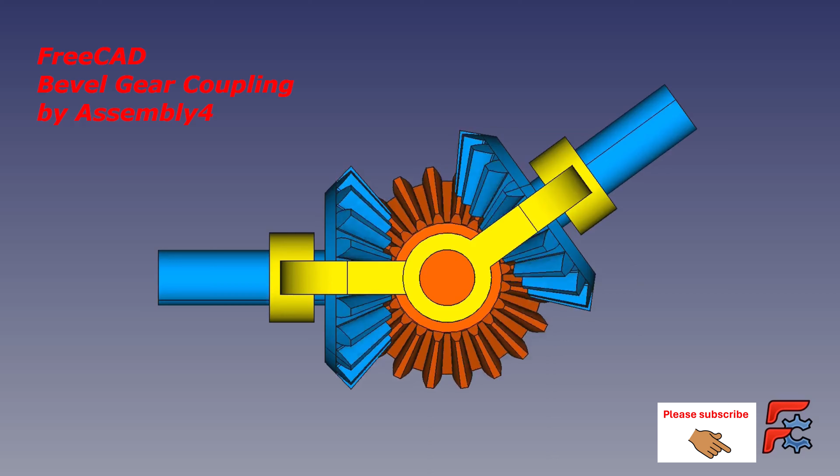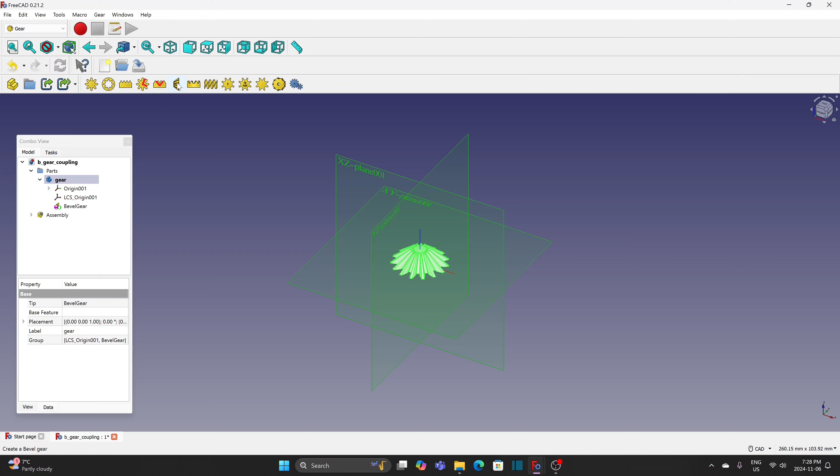Create a new file for the gear coupling. Switch to Assembly 4. Create the assembly file. In the Parts folder, create a body gear. Switch to Gear Workbench. Hide the coordinate planes.

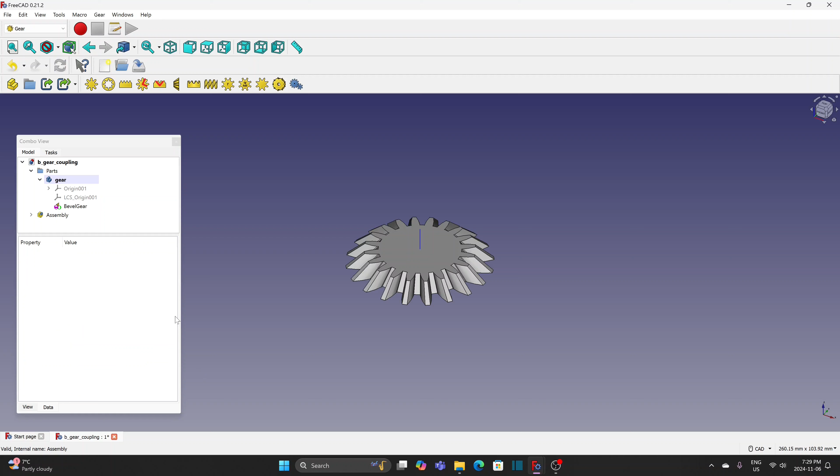Change the gear module to 2. Teeth to 20. Pitch diameter is 40 mm and pitch angle is 45 degrees. Change to Part Design.

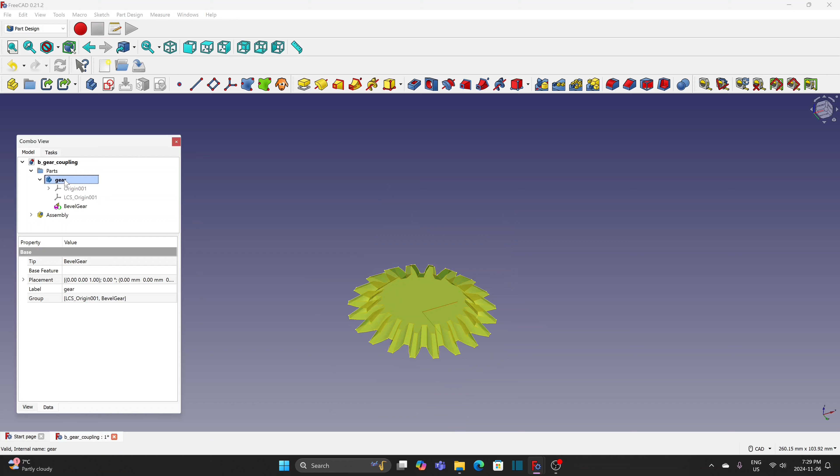Select the bottom surface of the gear. Create a new sketch. Get external geometry of the dedendum circle. Draw a circle and snap to one of the points.

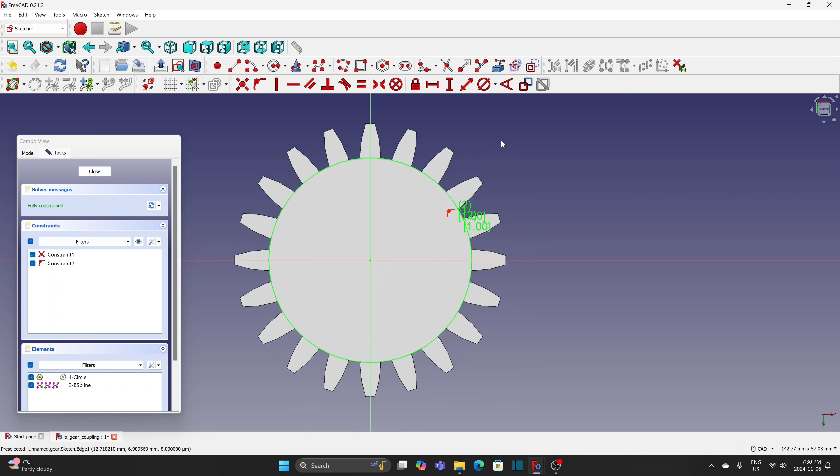Create a new sketch on XZ plane. Section view. Get external geometry of the circle. Use polyline to draw a triangle.

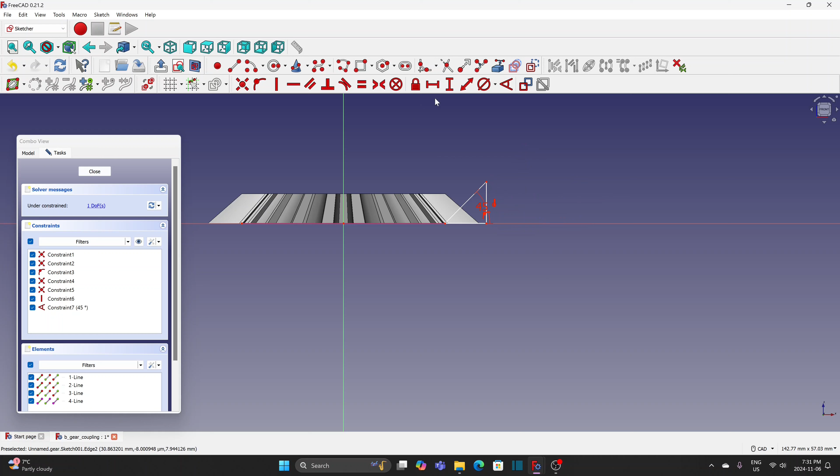Make this line vertical. Make the back angle 45 degrees, same as the pitch angle. Define the length of the line. Make sure it is outside the gear. So use 7 mm. Cut the groove.

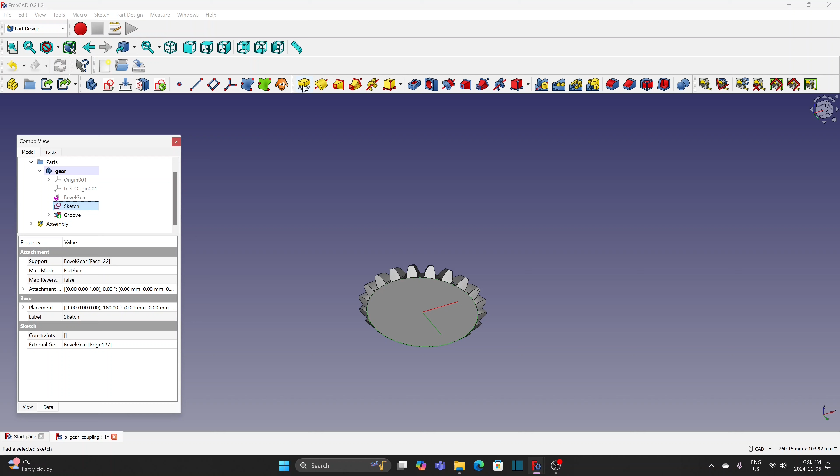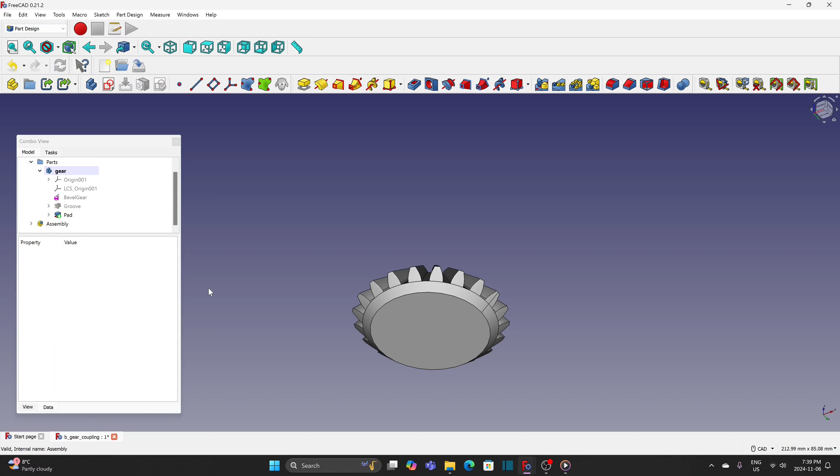Select the top surface and create a new sketch. Get external geometry of the tip. Draw a circle and snap to the tip.

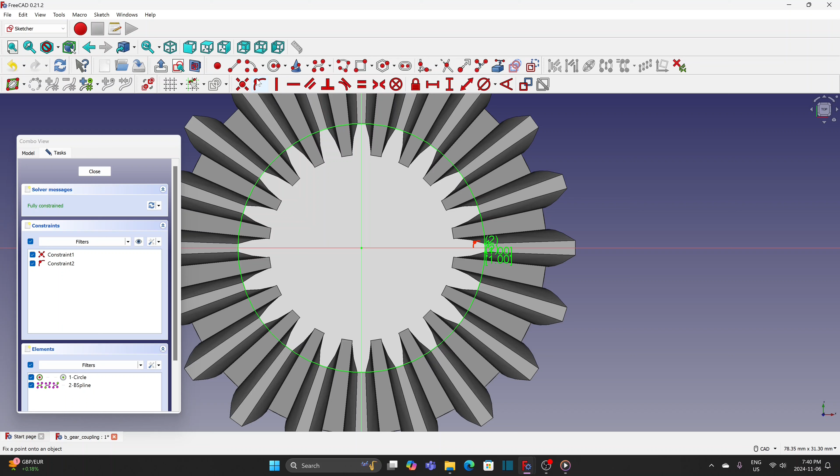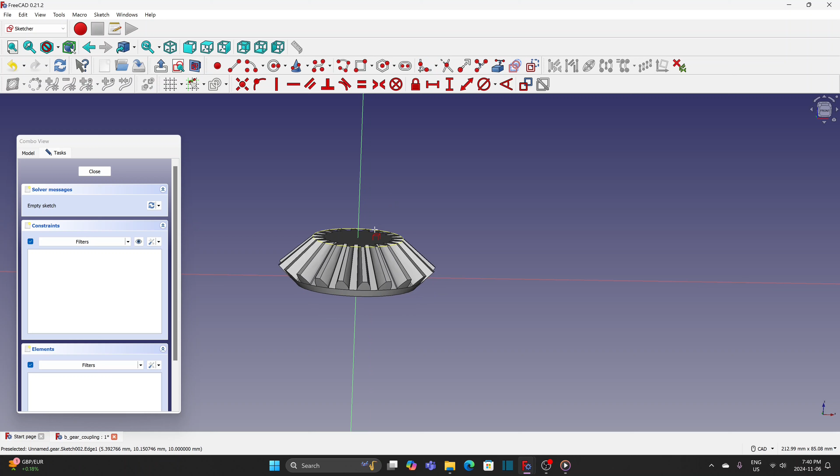Create a new sketch on XZ plane. And then get external geometry of the circle. Section view. Use polyline to draw a trapezoid.

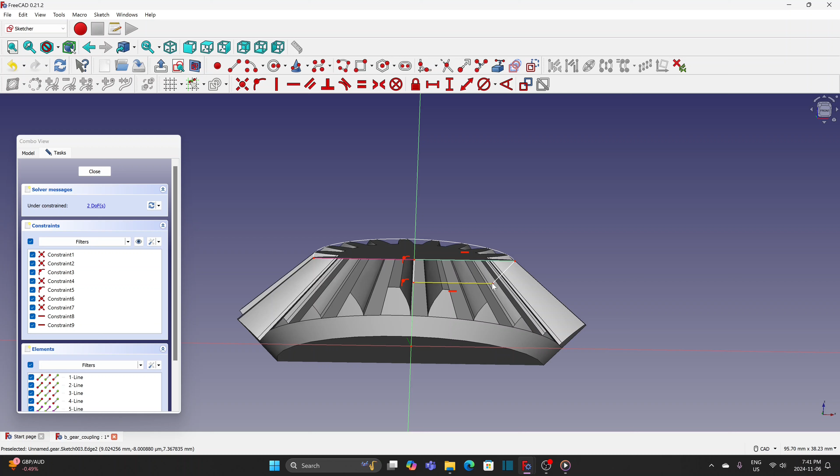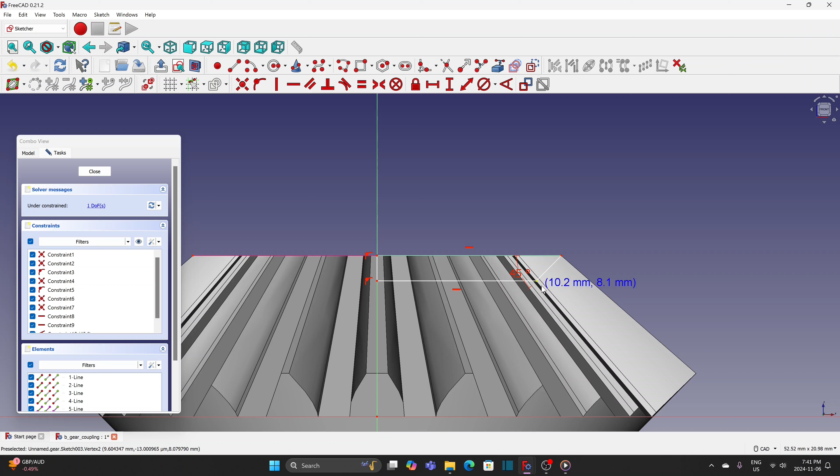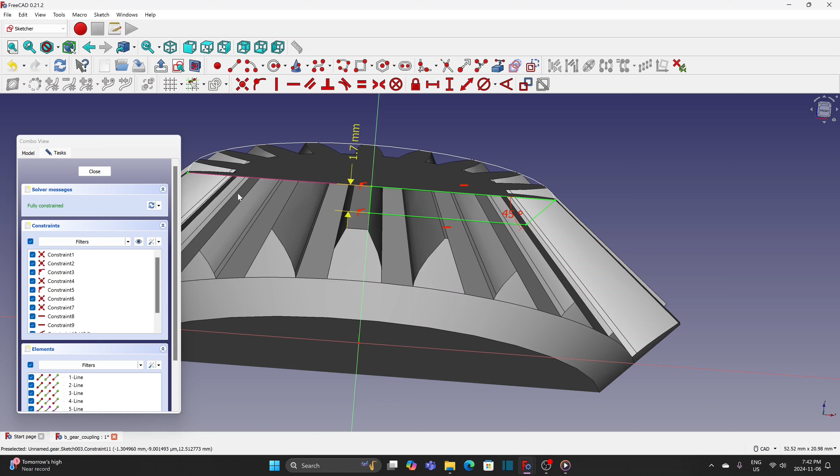The height is not constrained. Make this angle 45 degrees. Move this point so it is inside the dedendum circle. Set the length as 1.7 mm. Cut the groove.

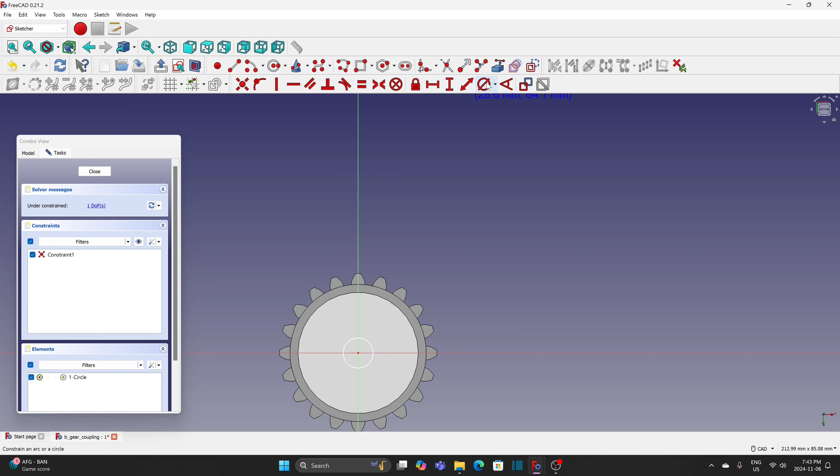Select the bottom surface and create a new sketch. Draw a 10 mm circle. Pad it 30 mm.

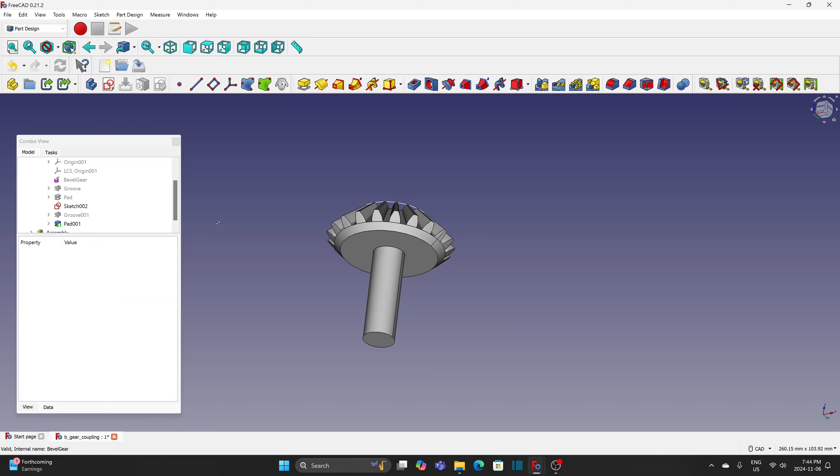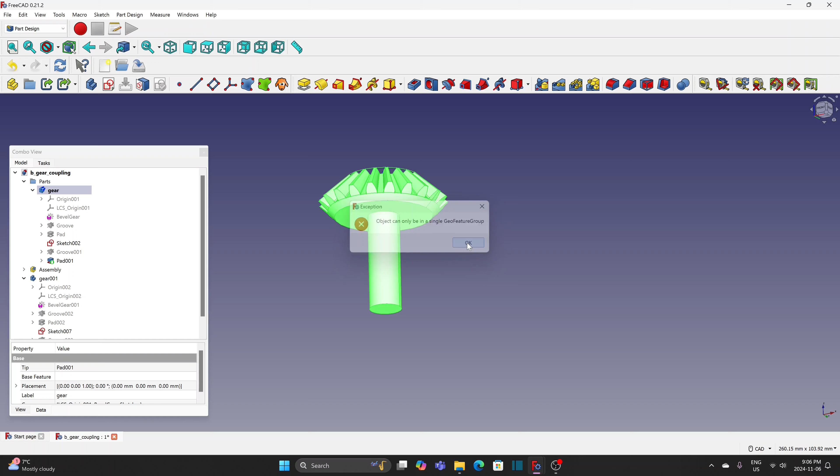Select the gear and duplicate the item. Click OK. Move the duplicate item to Parts folder. Rename it as pinion. Hide the gear.

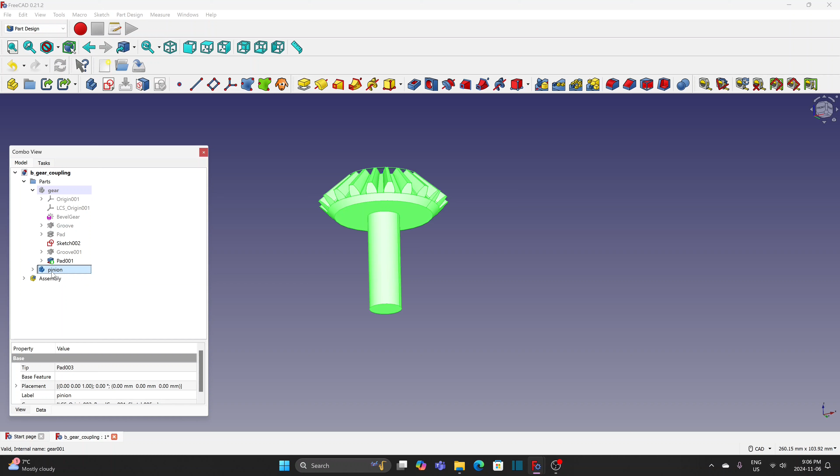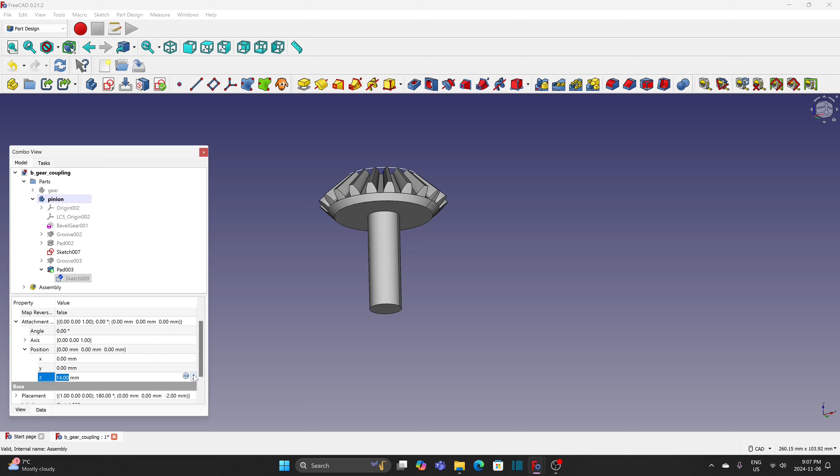Open the sketch in the pad. Change Z position to 14. Reverse the direction and change the length to 72. Switch to Assembly 4.

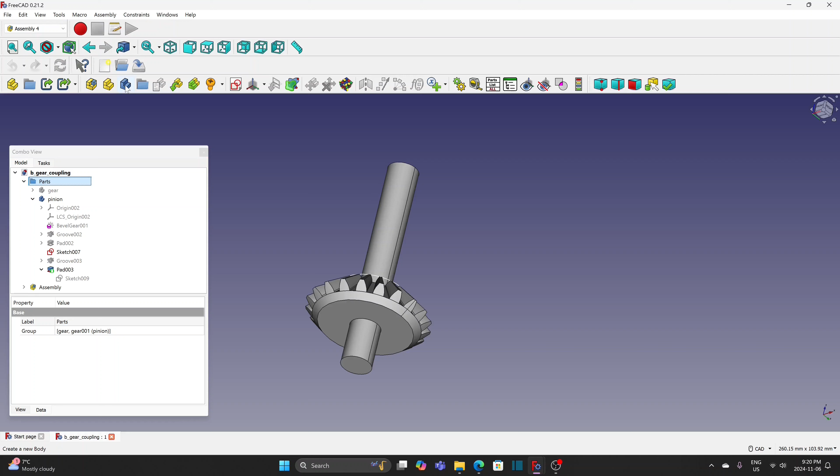In Parts folder, create a new body U1 bracket. Hide the pinion. Hide the origin. Switch to Part Design. Create a new sketch. Select XY plane.

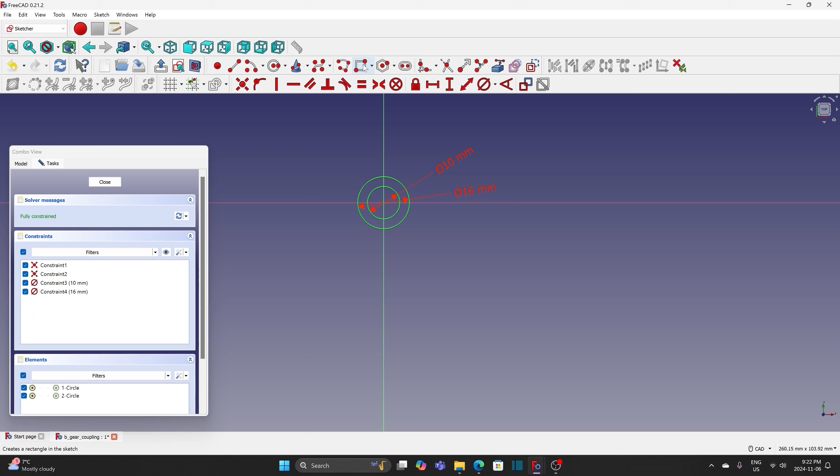Draw two circles. Draw a rectangle. Snap it to the circle. 6 mm by 30 mm. Delete these two lines. Make these 2 points symmetric about Y.

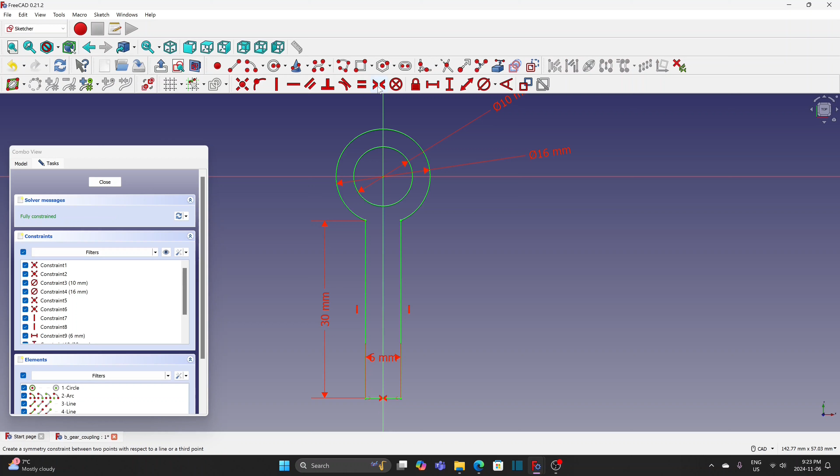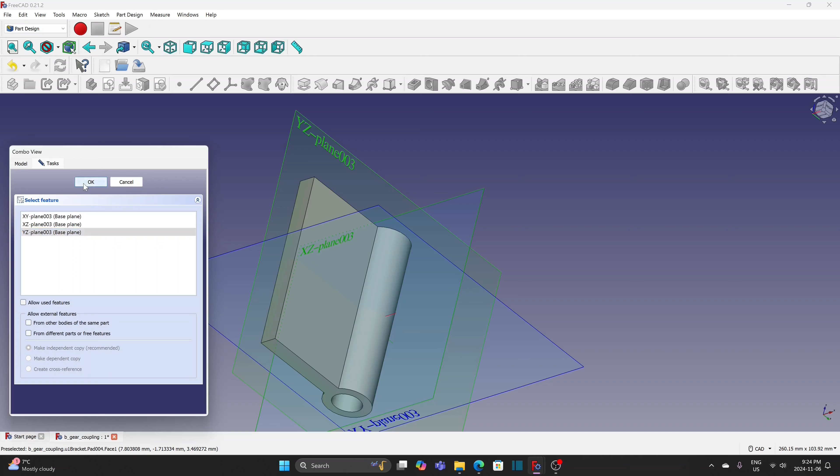Pad this shape. Select Symmetric to Plane. Use 60 mm as the length. Create a new sketch on YZ plane. Draw a rectangle. Section view. Make these 2 points symmetric about Y.

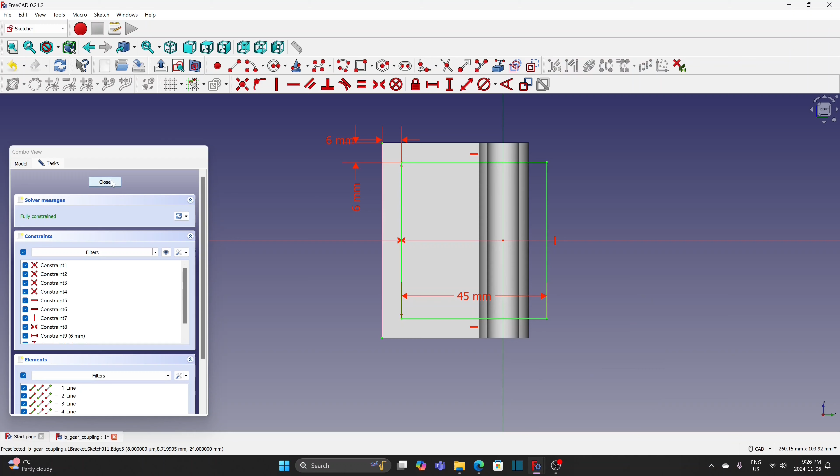Get external geometry of the edge. This point is 6 mm from the edge. Make this line 45 mm. Apply pocket function. Select Symmetric to Plane. Change to Through all.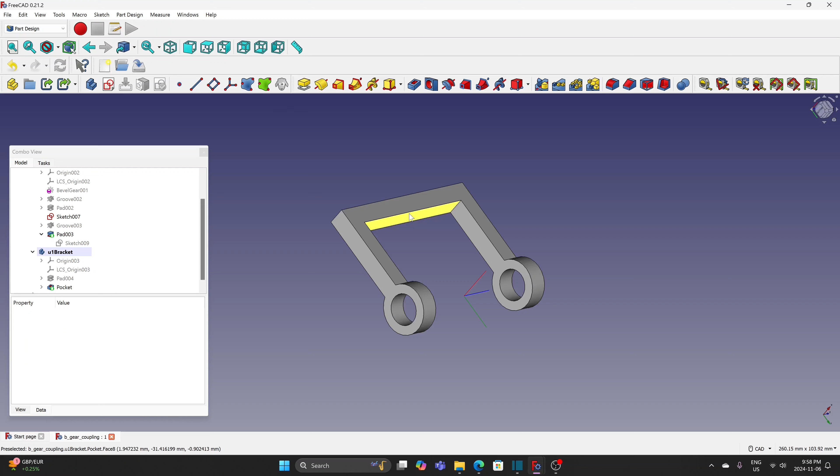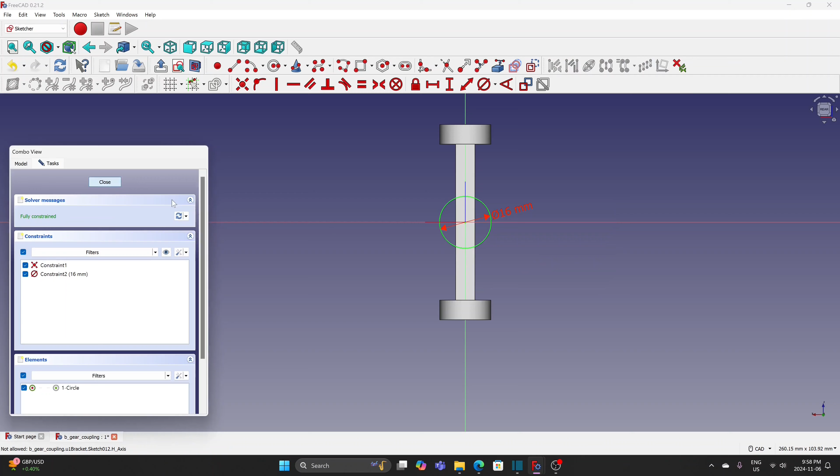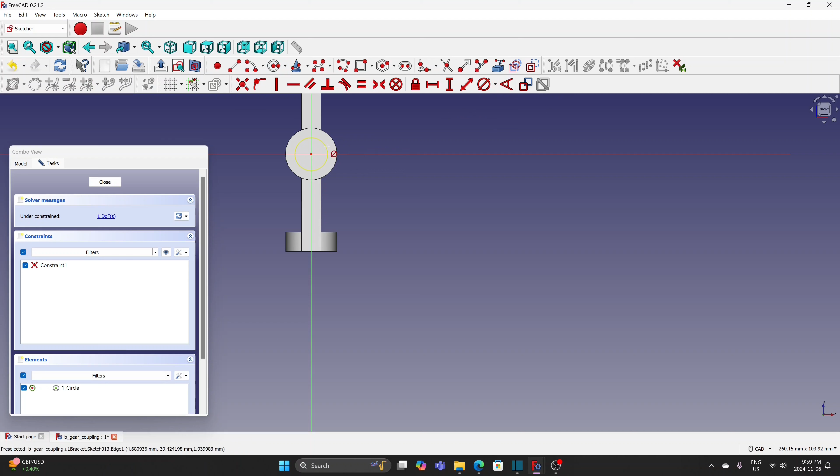Select this surface and create a new sketch. Draw a circle 16 mm. Pad it 8 mm. Reverse it. Select the top surface and create a new sketch. Draw a 10 mm circle. Apply pocket function. Change it to Through all.

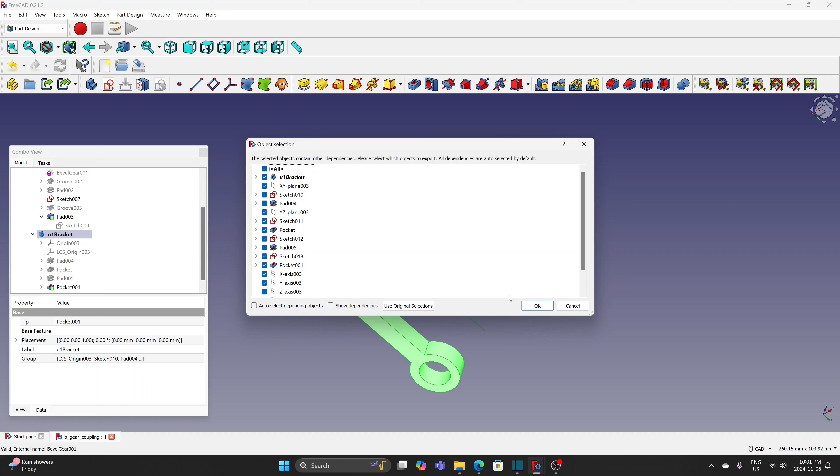Select the pocket and make a duplicate. Click OK. Move the item to Parts folder. Rename it as U2 bracket. Hide the U1. Change the length of the pad to 72. Change to wireframe.

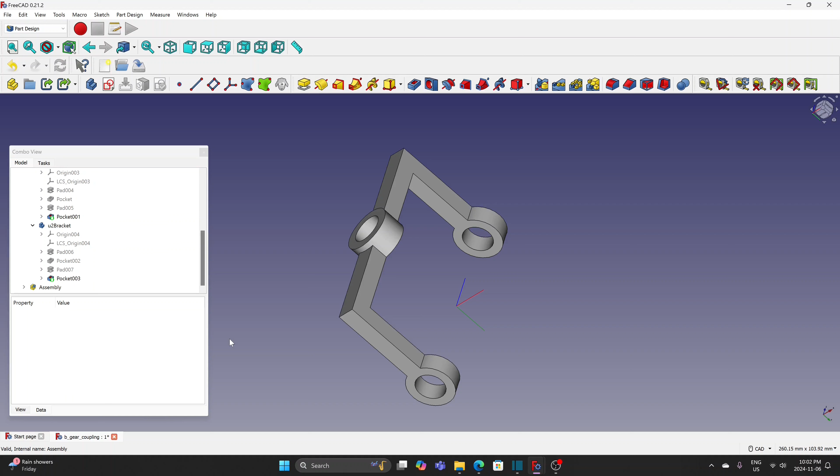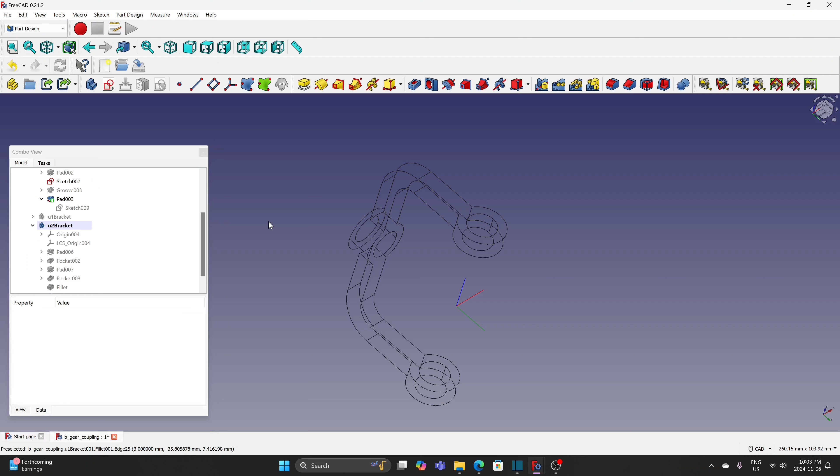Select these 2 edges and apply fillet. Radius 6 mm. For these two edges, apply fillet. Radius 12 mm. Change back to as is. Hide U2 bracket and show U1 bracket. Repeat the process to apply fillet.

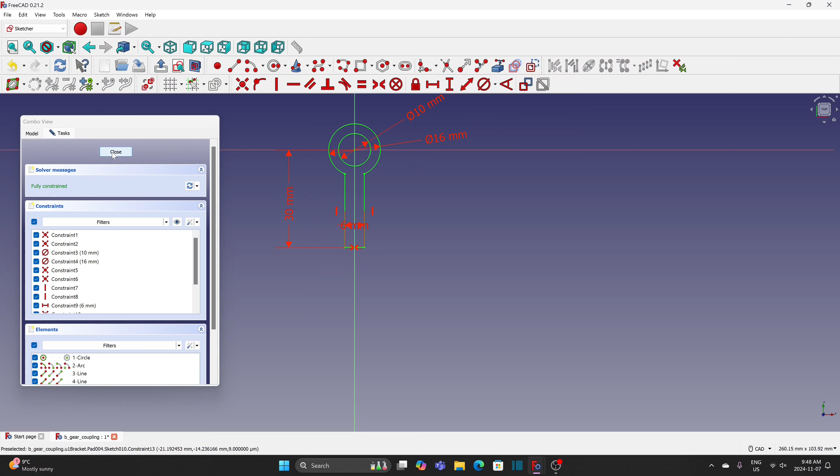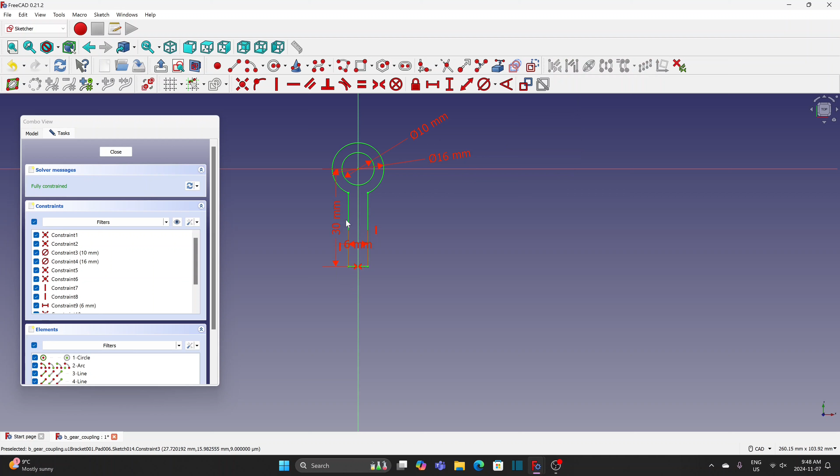Open the sketch of the bracket, we need to adjust the size. 30 mm should be from the origin to the end. Same for the other bracket. Switch to Assembly 4. Hide the bracket.

Create a variable angle. Select Assembly and create a new sketch. Master, Gear. Select Model. Select LCS Origin as reference. Go back to Task. Select Plane Face and default is XY. Open the sketch.

Draw two lines. Length 20 mm, as the pitch diameter is 40 mm. Define this angle as variable stock angle.

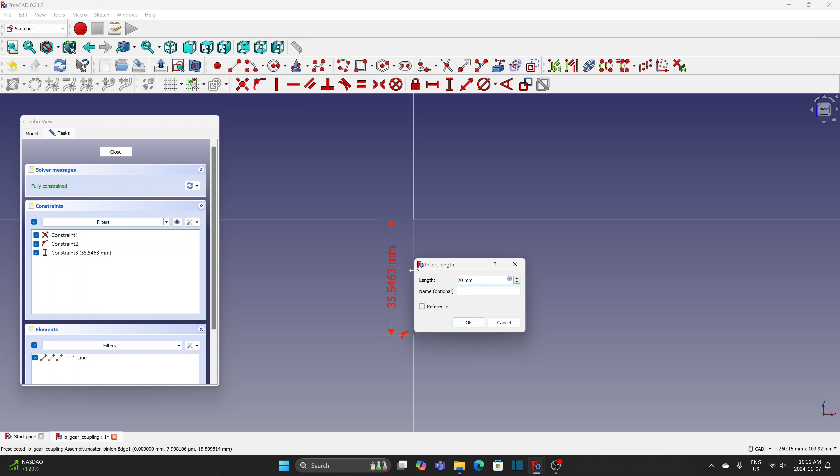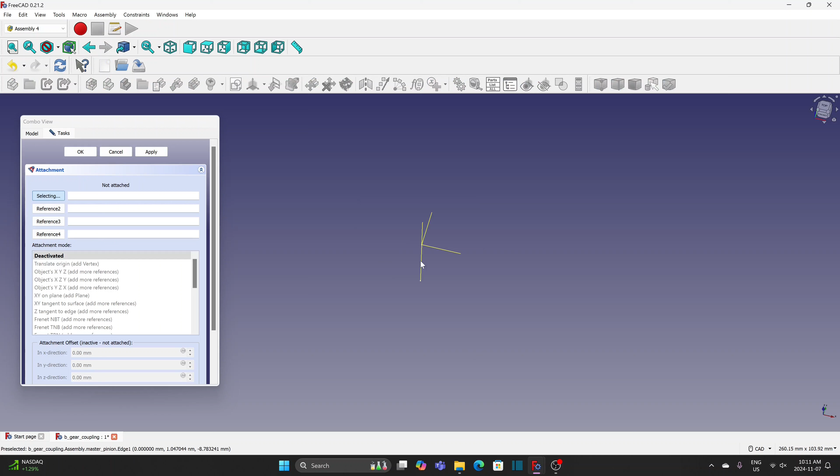Select the sketch. Create new LCS for the pinion. Select the line and click tangent to edge. Select the endpoint and move LCS there. Hide the sketch and LCS.

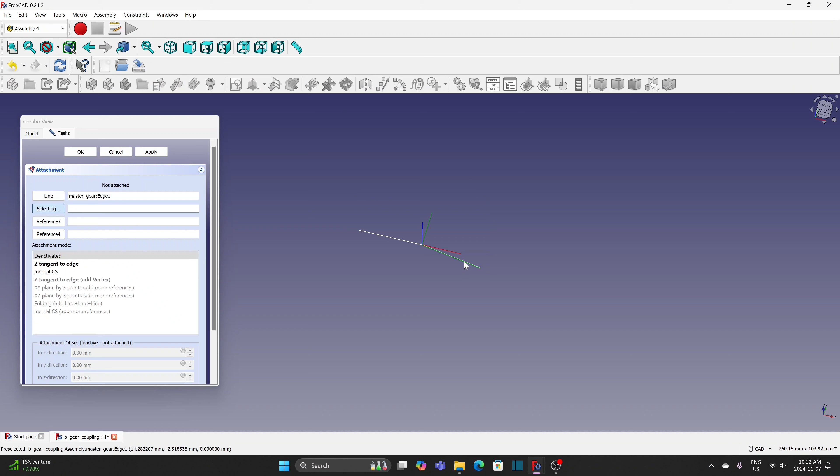Show the master gear to add one more LCS. It is for rotating the gear. Select the line at an angle and click tangent to edge. Select the endpoint to move LCS. Hide the sketch.

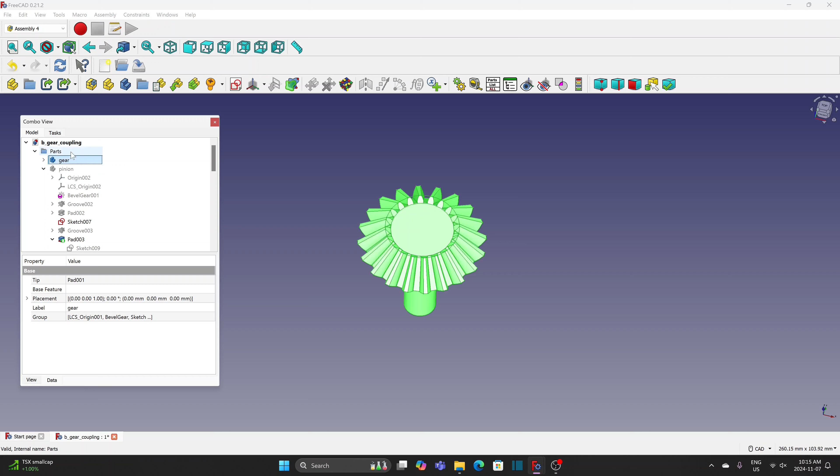Now create corresponding LCS for parts. Show the gear and create LCS. Select the circle edge and concentric.

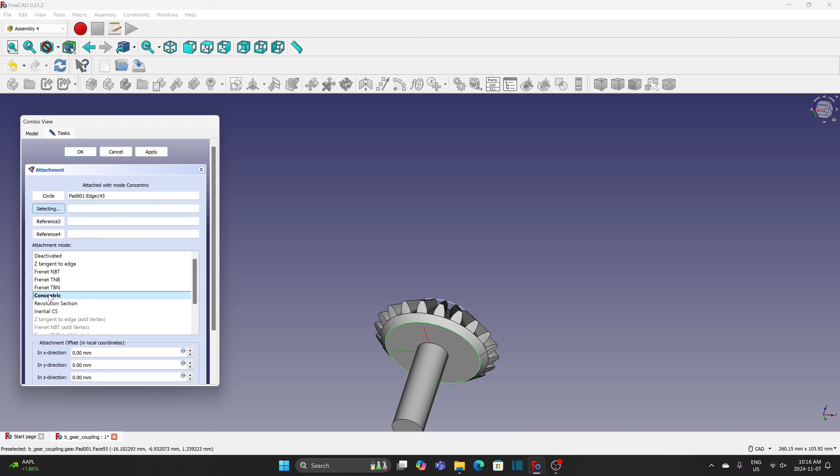Create one more LCS at the same position. It is because there are two gears and they may rotate at different directions. Hide the gear and show the pinion.

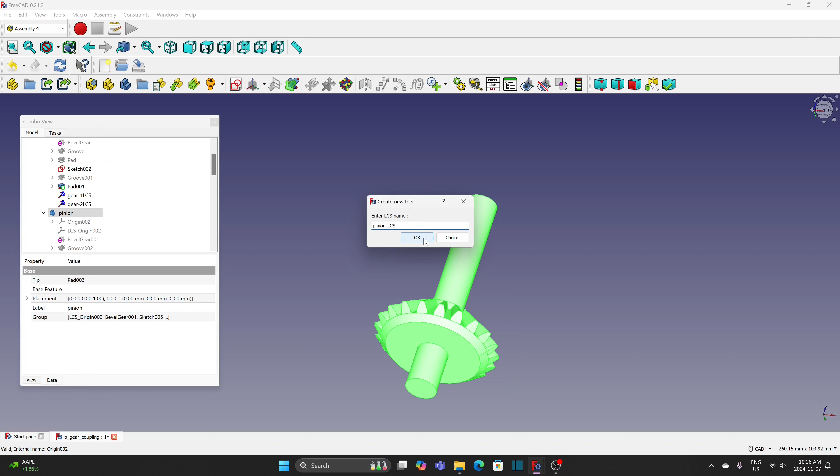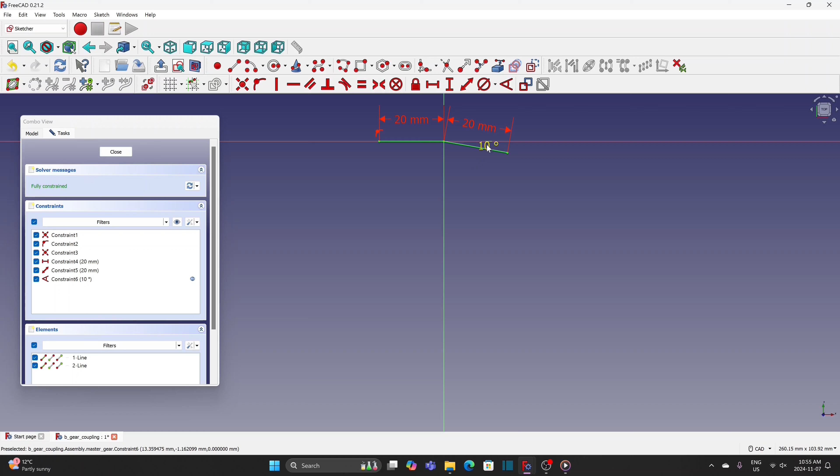Create new LCS. Select the circle edge and concentric. Hide the pinion. Show the sketch master gear. Change the angle to a fixed angle.

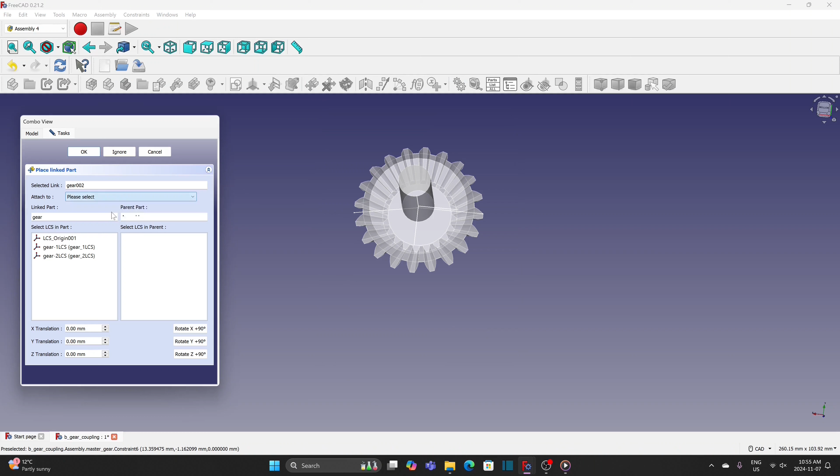Insert the first gear. Select Parent Assembly. Select 1M and Gear 1 LCS. Rotate X twice. Move it outward along Z direction by 2 mm, because I add a base at the bottom of gear which is 2 mm thick.

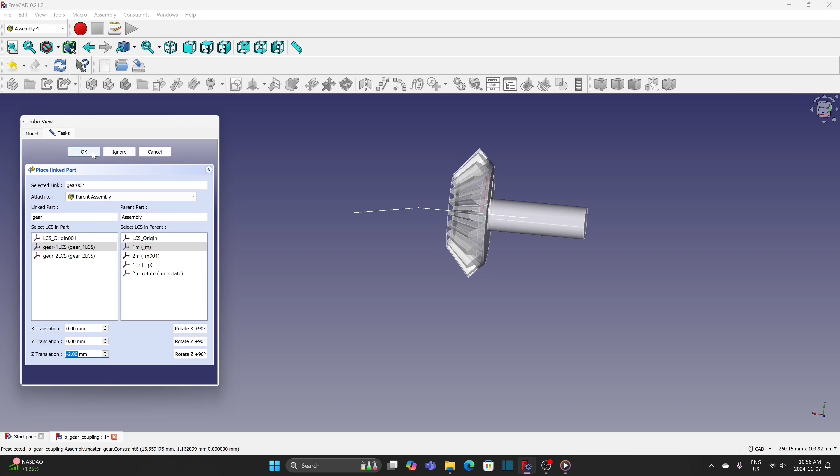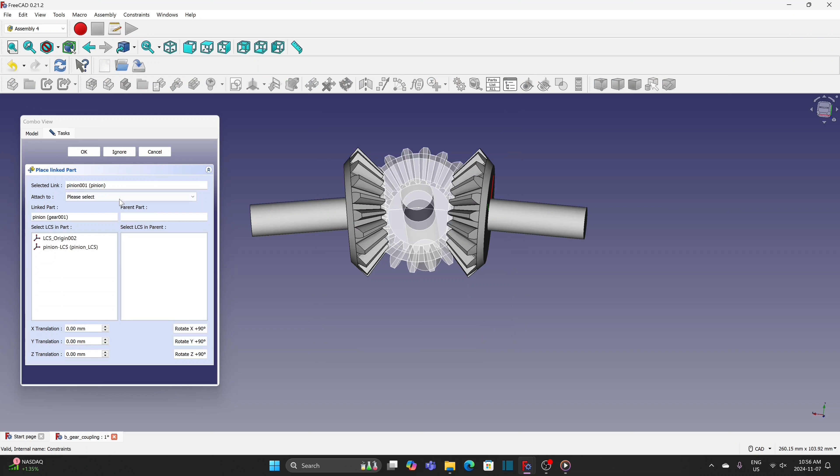Insert the second gear. Parent Assembly. Match 2M to Gear 2 LCS. Rotate X twice and adjust Z to -2. Insert the pinion. Parent Assembly. Match 1P to pinion LCS. Rotate X twice and change Z to -2.

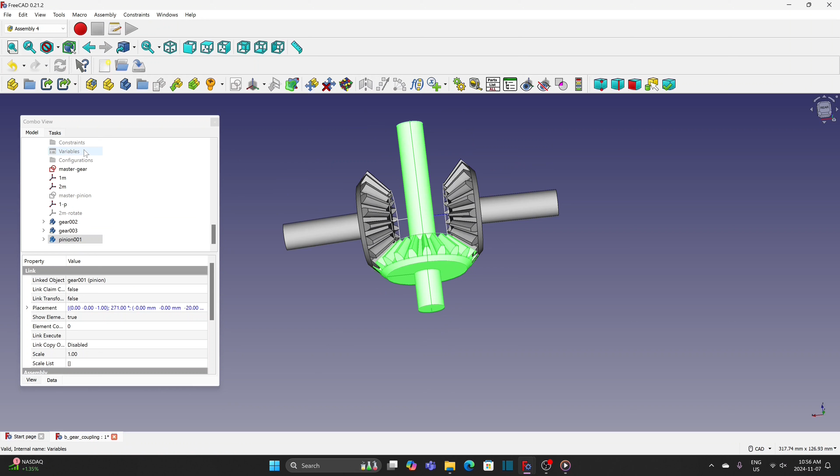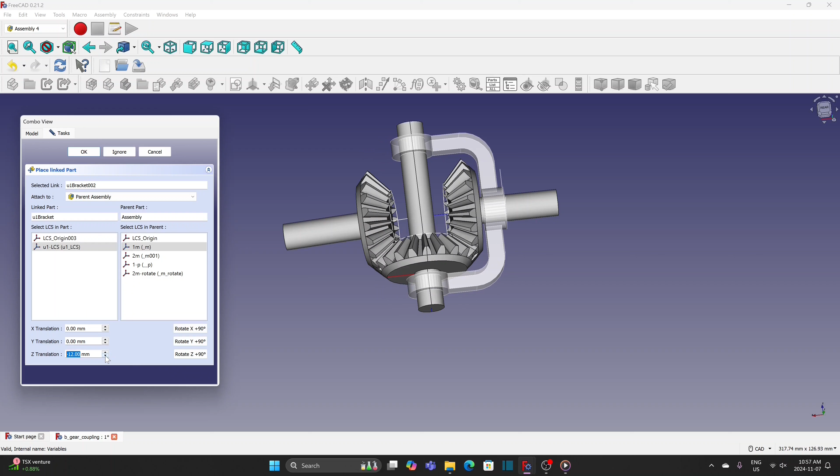Insert U1 bracket. Parent assembly. Match 1M to U1. Rotate Y and Z. Adjust Z to -12. We name this LCS because it is for the second bracket, which should not rotate about the shaft.

Insert the second bracket. Select parent assembly. Match 2M bracket to U2. Rotate Z and Y. Adjust Z to -12.

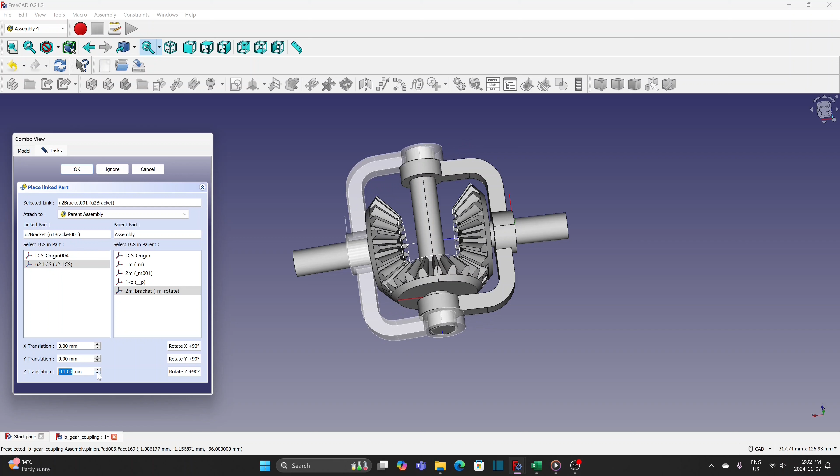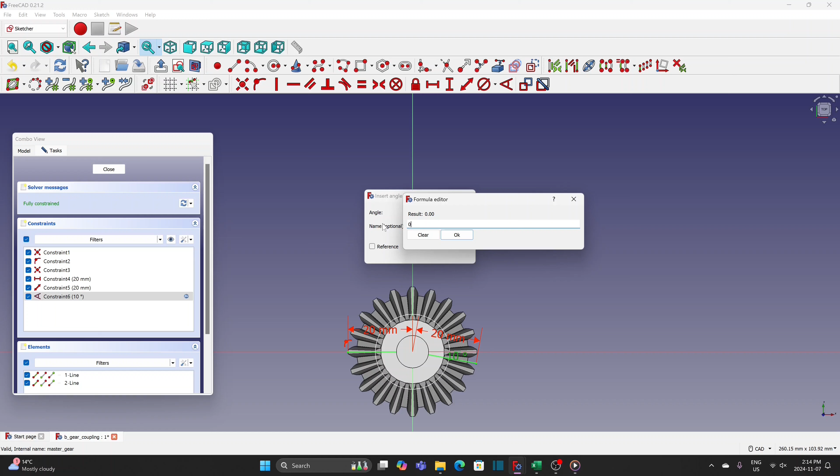Select the sketch master gear. Change this angle to 0 so it is easier to mesh the gears. Change the variable to 0 too.

Apply variables to the LCS to rotate the gears. Minus variables dot angle. Same for the second gear, minus variables dot angle.

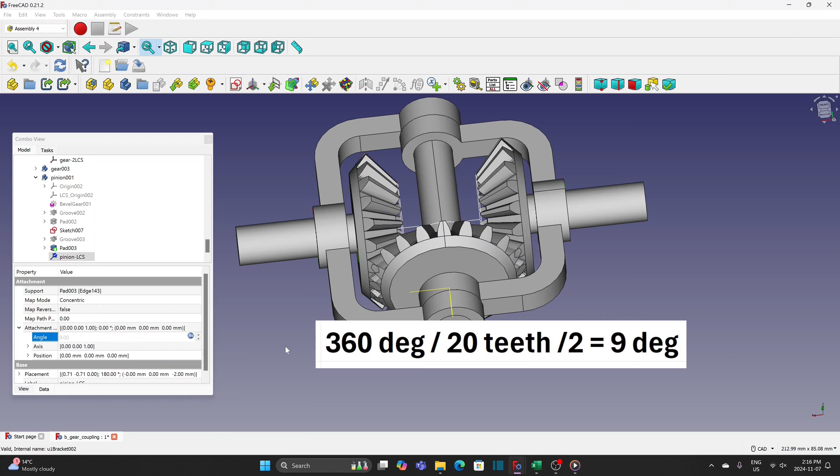For the pinion, it is variables dot angle as it is at opposite direction. The gears are not meshing, so add 9 degrees to the rotation. Gears are meshing now.

Test the animation. From 0 to 360, step size 1. Change step size to 3 to make it faster. It looks good.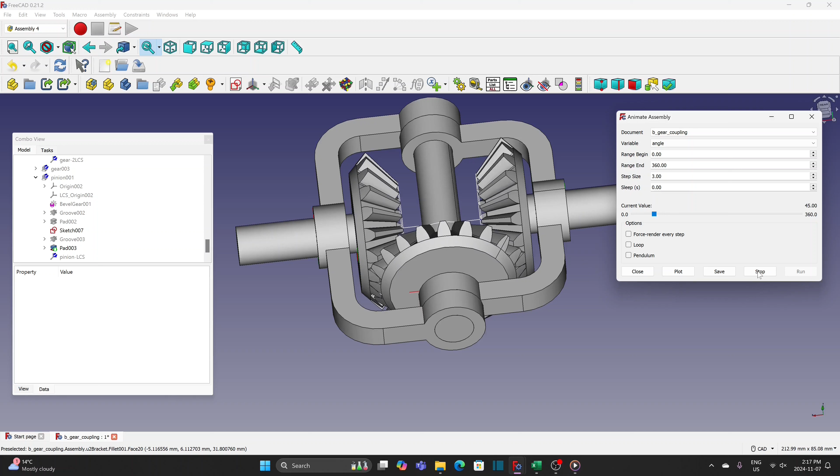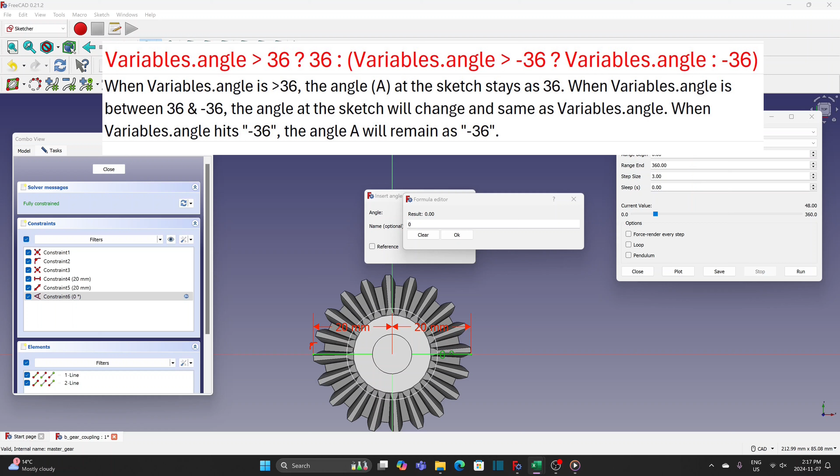To swing the shaft between -36 and 36 degrees, I create a conditional expression for the motion like this. Change the range from 72 to -72 for the test. The second gear stays at 36 degrees and rotates. When the angle hits 36, the second shaft starts to swing.

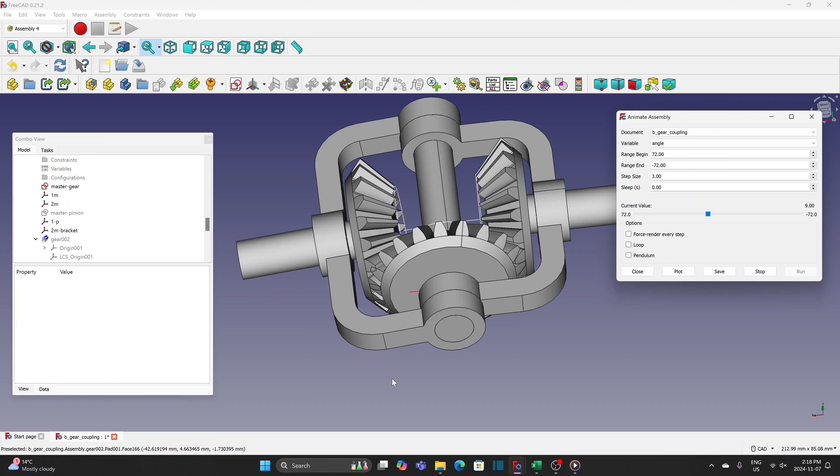However, the second gear and the pinion are not meshing. When the angle hits -36 degrees, there's no more swing and only rotation, and all the gears are meshing again. So next step is to add more rotation to the second shaft during the swing. Go to LCS 2M. Enter this conditional expression.

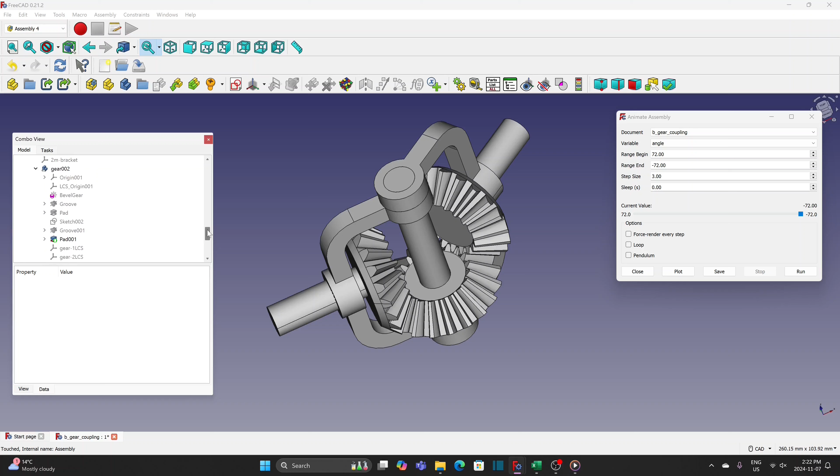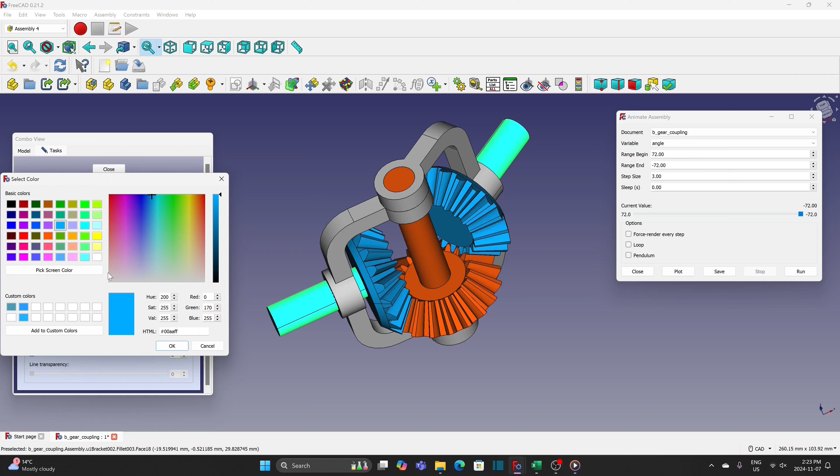Hide the sketch and LCS. You can use this icon to hide the LCS too. Change the pinion to amber, 2 gears to blue, and the brackets to yellow.

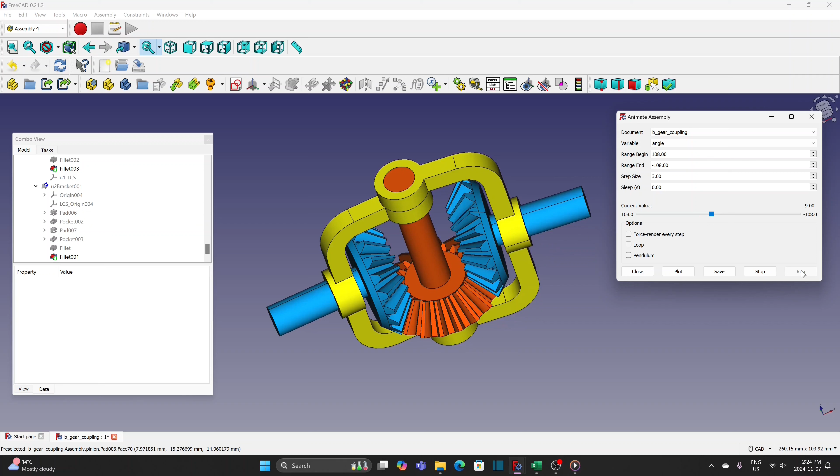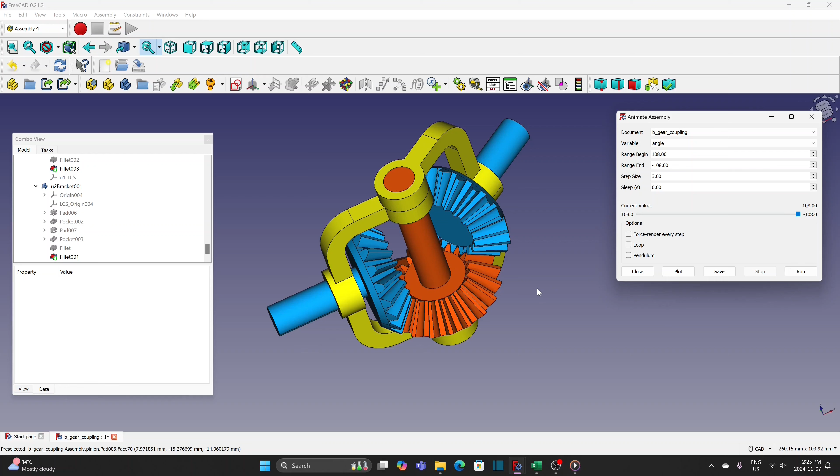Increase the range from 108 to -108. Run the animation again and see if all the gears are meshing or not. It is working fine. See it from another angle.